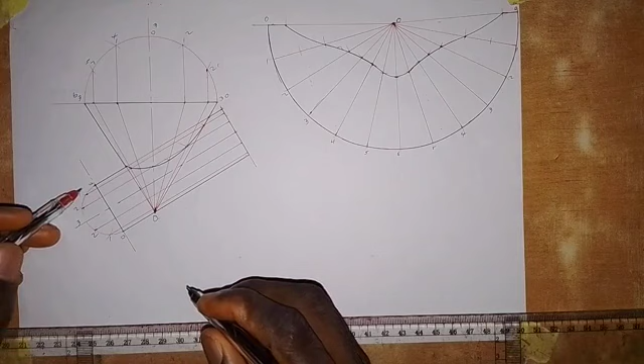As I said, the seam is going to be along this part here, so we are cutting it along this part and we are opening it. So I'm going to number what we have here also: 0, 1, 2, this is 3, this is 4, this is 5, and this will be 6. Okay, so I've done the numbering like that.

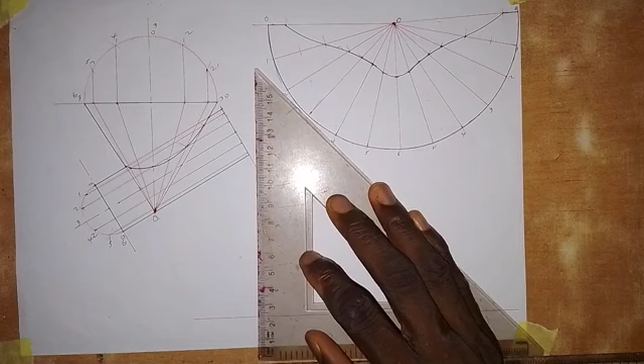So the next thing that we are going to do is draw a horizontal line along this part here, like this. Then on this horizontal line, I'm going to draw a vertical line at this point, like this.

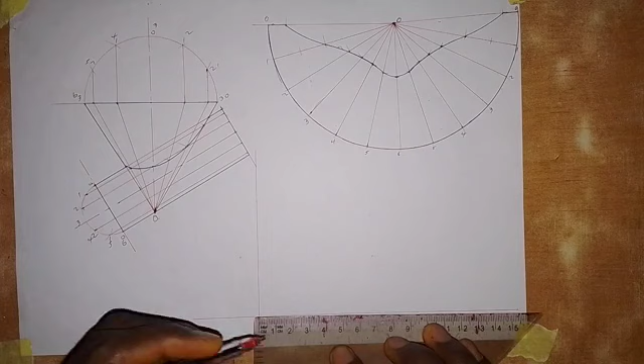Then I'm going to calculate the circumference of the circular base of this cylinder. The circumference is 3.142 times 32, which gives me 100.5, approximately 101. So I will take a measurement of 101 millimeters on this line, from this point here. So this is 101 millimeters.

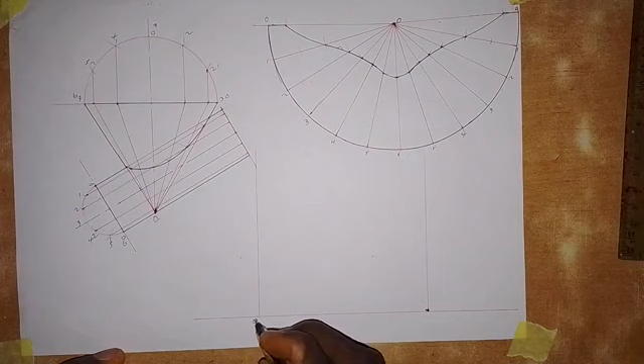At this point also, I'm going to draw a vertical line like this. But before we go on, I need to divide this distance. Here we are opening from 0 to 0, so this will be 0 and this will also be 0. This distance 0 to 0, I'm going to divide into 12 equal parts.

I'll do that while I pause the video, and when I'm done, I'll come back and show you the next thing to do. Alright, so I've divided it into 12 equal parts. The next thing, before I do the numbering, I'm going to erect a vertical line on each of these points.

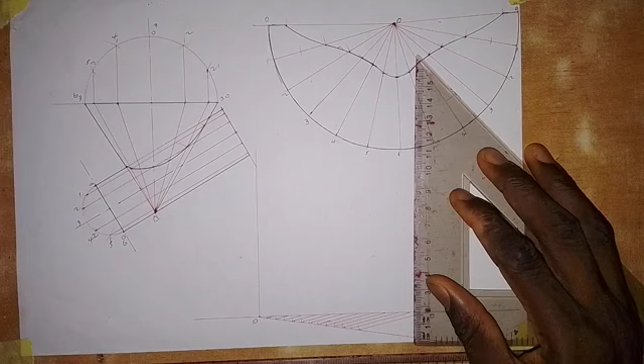So here I will draw a vertical line. At this point I will draw a vertical line, and here also. So draw a vertical line on each of these points.

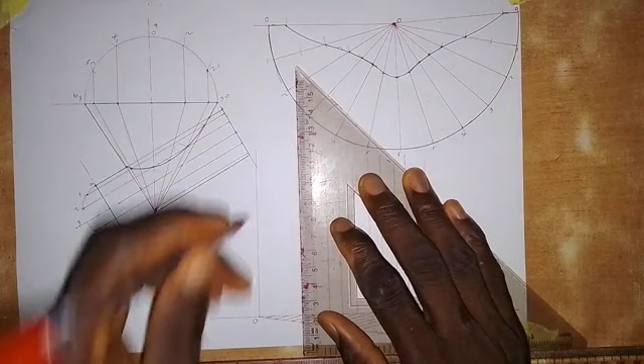Alright, with what we have done here, the next thing is that we take the height. Okay, this line is not straight. Also this one.

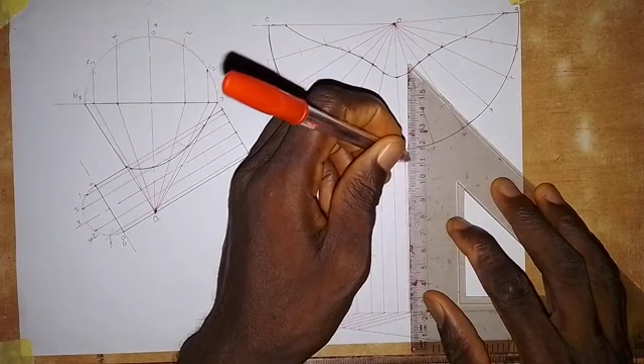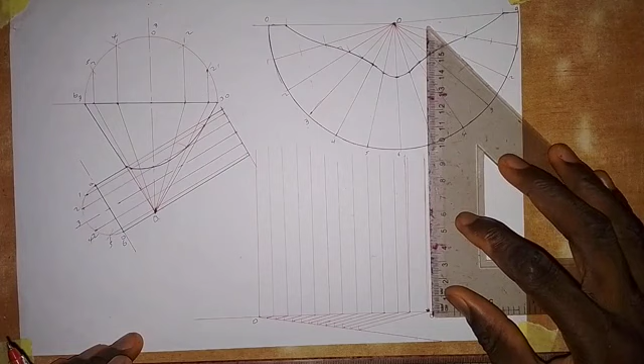Alright, the next thing is to take the height. The total height from here to here is 84 millimeters, so I will take a measurement of 84 millimeters. So this is 84 millimeters, and I'm going to draw a line here.

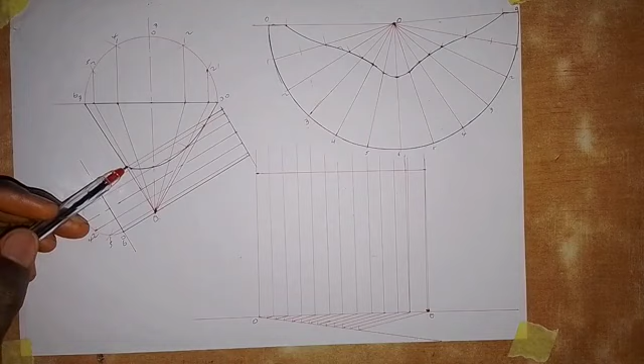Then the only thing we need to do is get this part that has been removed, and it's going to be on the extreme because we are opening from here. So all I need to do is take my compass, starting from here.

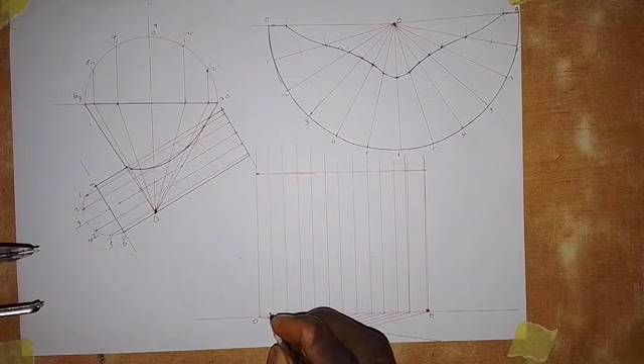If I number these points: this is point 1, and 1; this is 2, and 2 here; this is 3, and here is 3. I don't have to go more than that. Then for 0, I have this point down here, so we are going to have the point here and up here.

So I'll make an arc here. Also, I'll make an arc here on 0. The next one is, for this same 0, from here I will take it up here for 0.

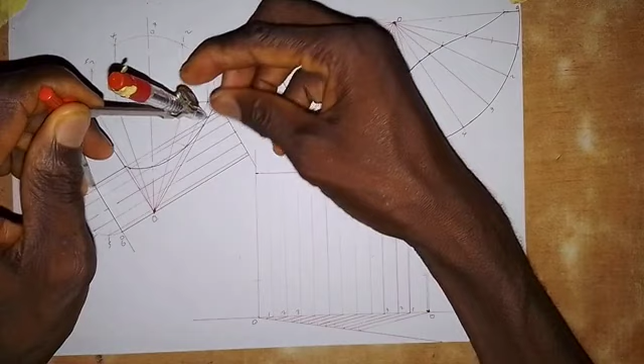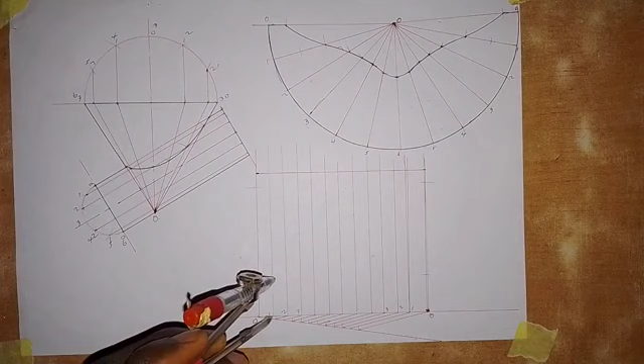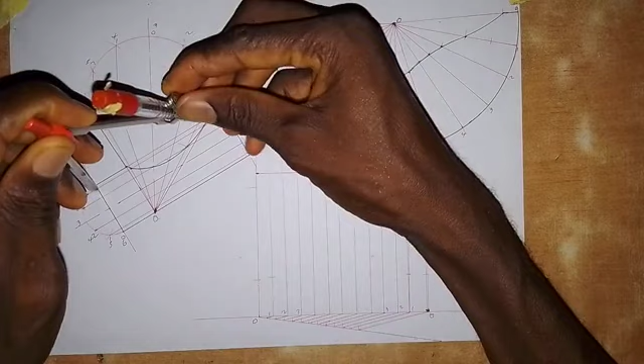Okay, so putting it at this point, I make an arc here. Also I make an arc here for 0. Then for 1, from here to this point here for 1. So putting it at this point for 1, here I make an arc. I'm putting it at this point, I make an arc here. And then for the upper part, this is the point. So you put it here, and for 1 you make an arc here. And you come here also, so you make an arc here on 1.

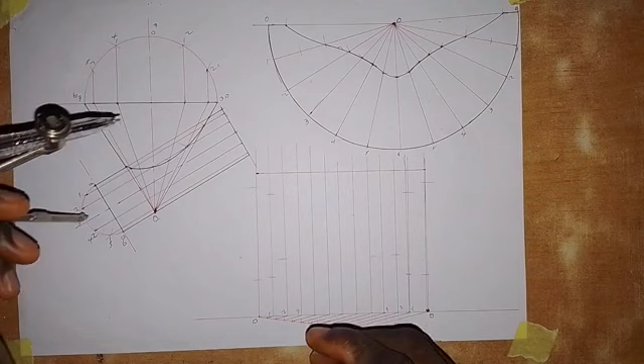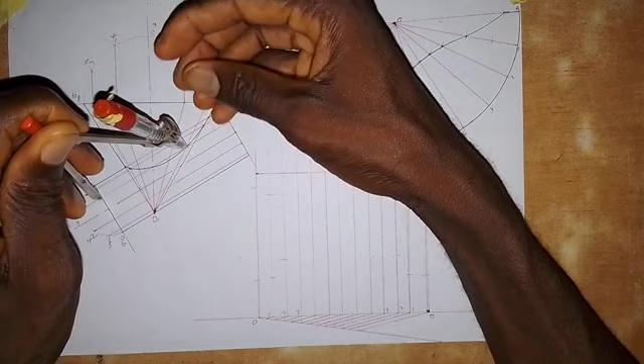Then the next one is 2. So from this point we extend to this point here for 2. So you put it here on 2. Here we make an arc, and then bringing it here at 2, we also make an arc here. Okay. So for the upper part for 2, we extend it to this point here on 2. So here we put it out to here and make an arc here. Then we make an arc here at this point on 2.

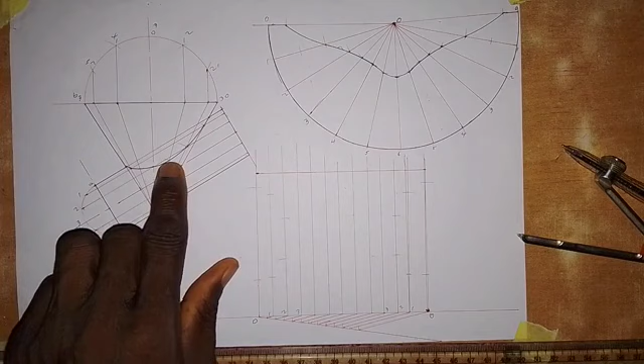So if you look at this thing, it goes a little bit beyond 2. So there's something I need to do here. I'm going to draw a line. We need to locate this point. So with my 60 degrees 30 degrees set square, I'll draw a line from this point down here. Okay. Alright, so we need this point here.

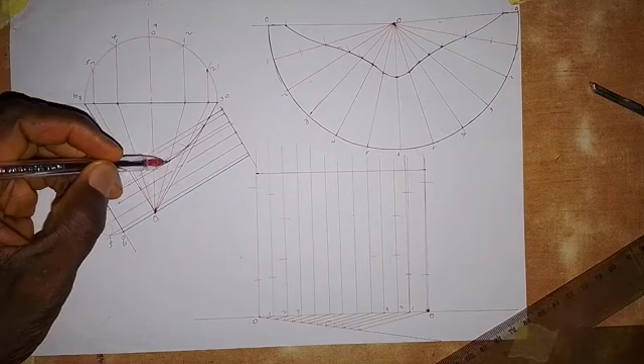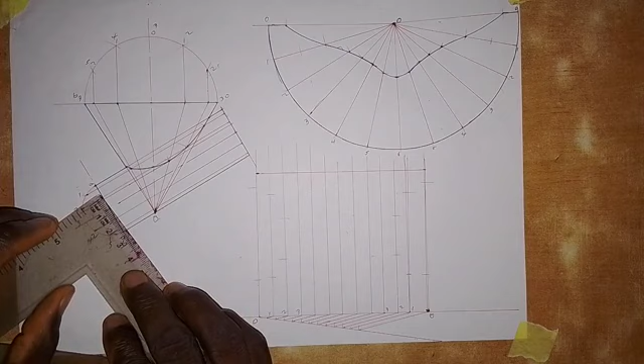So for this point that we have here on the arc, the distance is very small. So after 2, around here, if I take the measurement here, this is around 2 millimeters. So I'll take it as 2 millimeters. Come here, I'll take 2 millimeters at this point. And here also I'll take 2 millimeters from this point here.

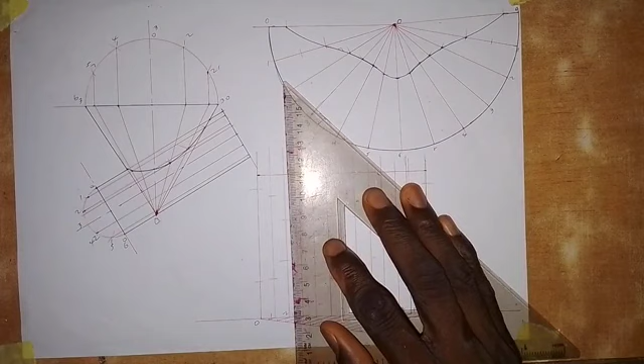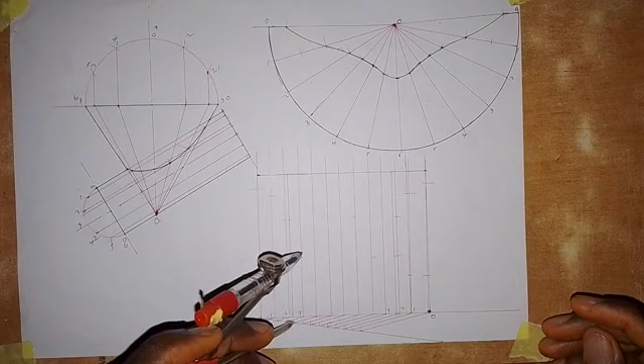Then I'm going to draw a vertical line here, like this. And come here also, I will draw a vertical line like this. Okay, so to locate the point, I'll put the midpoint of my compass here and extend it to this point here. So bringing it to this point on the line that we just drew, we have it here. Then putting it here, we also have it here.

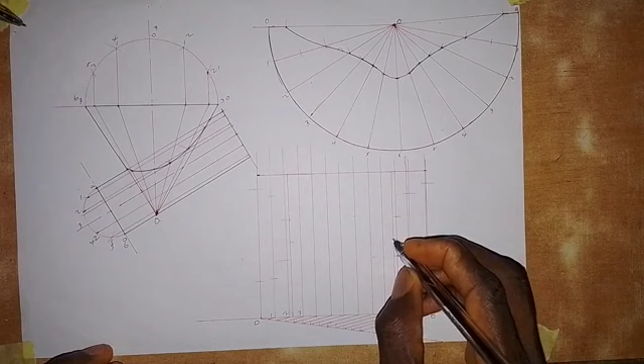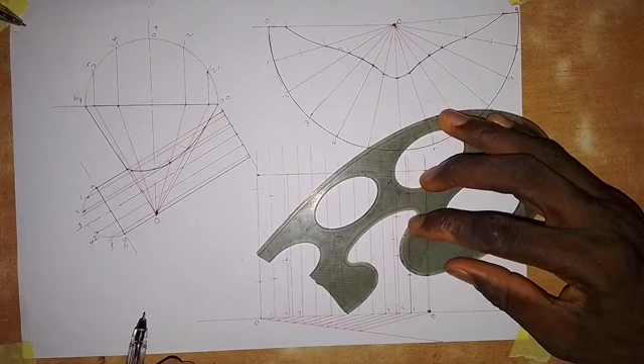Those points are very, very important. We are going to connect these points together with the use of the French curve. So we have this point, this point, this point, and this point. Alright, so with the use of the French curve, we connect these points together. Okay, so I join this together like this, and connect this together.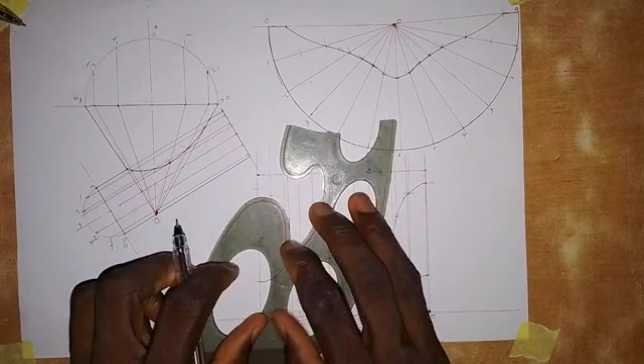Alright, so then come here also, I will do the same thing on this side. Here I'll connect this together. Alright, so this is what we have.

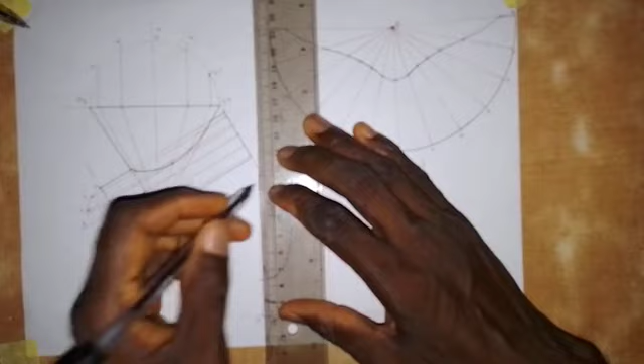The next thing we are going to do is make this line from here to here a thick line. Also we make this a thick line, and we'll do the same thing here. We make this a thick line, and this also a thick line. Then this line we make a thick line from here to here, and also this one, from here to here.

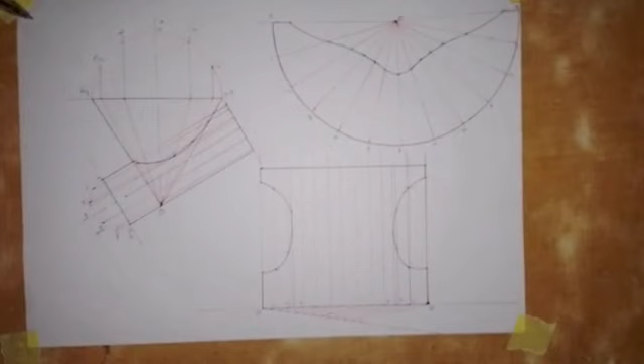Alright, so this is how the surface development of the cylinder will look. As simple as I've done it here. All you need to do is practice it. When you practice it, you become a master at it.